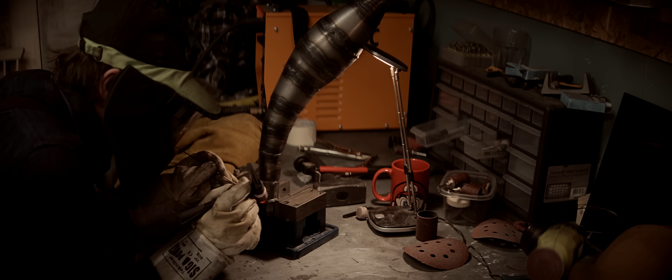There's threads in there, making the drill wander. I thought I clearly test fitted this. Did I test fit it in the wrong hole? It might be because I brought this from inside and it was hot, and now it's cooled down enough to be tighter. I'll turn it down until it fits.

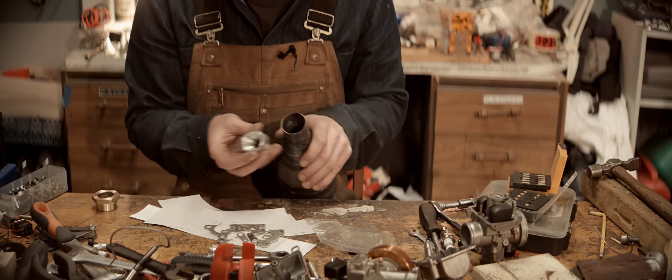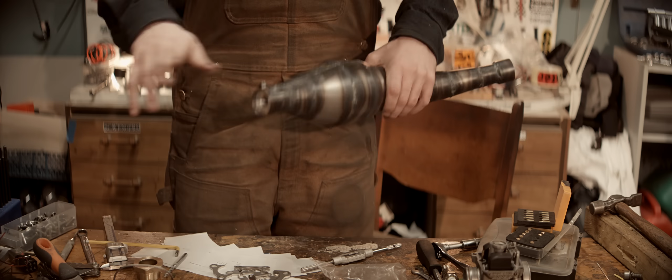This will be our hold-in thing, I think. Maybe it's overkill. Let's just drill and tap a hole. This is just too much. ...stinger. And now the exhaust spigot thing.

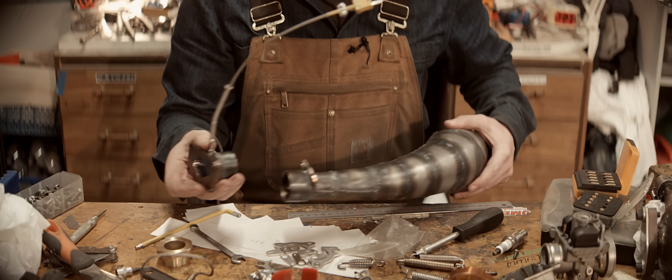It is done. I finished the rest of it, the welding of this spigot flange thing, and some spring mounts and stuff off camera, because I'm running out of time today, but I really want to get at least one test run in before I have to close shop.

As is tradition, I ran it out of fuel, and I also ran out of time, so this is the next day. I'm not trusting the fuel flow from this tank, so I've installed this separate tank, and we're going to use that from now on. And I've installed a filter just to be safe.

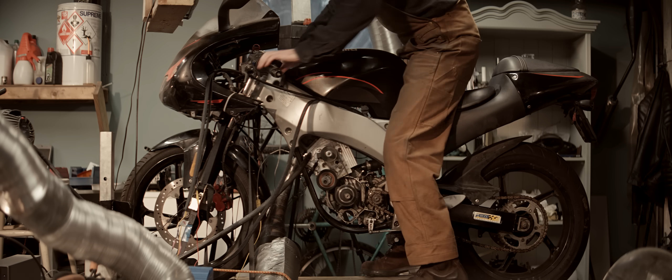I'm just gonna add in a bunch more timing down low, because there's no point in having it running this badly down there. Now set at a flat line 15 degrees, and below 12,000 you could probably run 30. So I need to update the software, because people have been saying that the version 106 software could have some problems with interpolation between points. Well, now there's from 10 to 12K. As long as it drops to 15 there, then we're fine. Gotta remember to turn on the screen recorder.

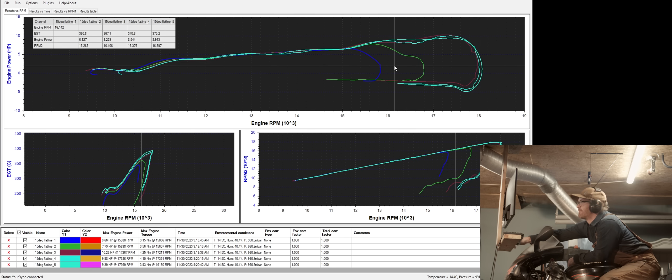Around 10 horsepower at 17,300 RPM, which isn't a lot, and torque is low, like between 3 and 4 newtons of torque, which is not a lot. You can see how it didn't want to rev until the pipe got heated up, which makes sense, and just cuts out at 18,000, sounds like a misfire or something.

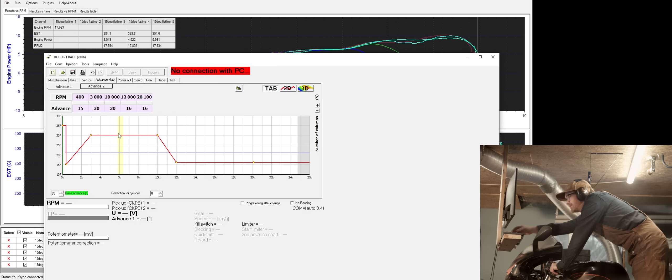I'm gonna increase timing by 1 degree, the flat line, and see how it behaves, because we don't know if 15 might be 14, you know. I haven't set timing that accurately, so let's try 1 degree more of timing, and we'll just keep increasing timing as long as power is raised.

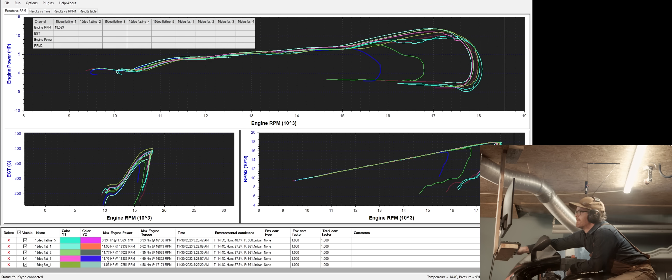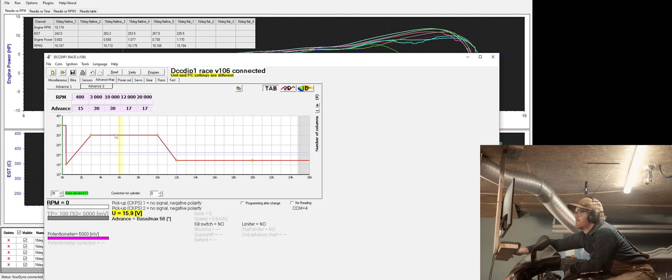So with 1 degree more of timing, we pretty much gain 1 horsepower, from around 10 to around 11 horsepower. So let's add in 1 more degree and see what happens. 17 degrees. I noticed it wouldn't rev as high, like it cut out a little bit earlier, which also makes sense because there's less heat in the pipe. EGT numbers are really low still, like they've always been. Okay, 17 degrees. Got a little bit more. Let's try 18.

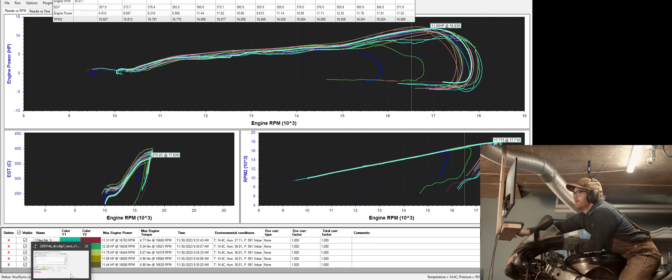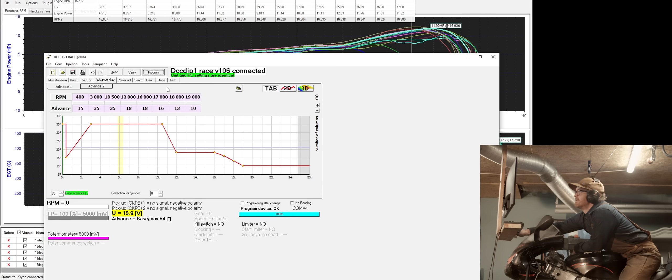Between like 11 and a half, 12 horsepower, and it seems like going up to 18 we're at the point of diminishing returns. We've also shifted the power peak almost 1000 RPM down in the power band. What I'm going to try now is to keep it at 18 at 16,000 and then ramp it down fairly quickly. Try 13. This is just for easier running below the power band. And now with a dropping curve after peak, which should be the ticket. Actually, I'll add another point and drop it even further, 18,000. See how it behaves, and then let's talk a little bit about what I think's going on.

It wanted to rev a little more, of course, with the lower timing up top, but less timing at the dropping curve made us lose power at peak. So the best one so far was the 18 degree flat line, the highest amount of torque and at high enough RPM to create the highest amount of power also. So almost like high 11, maybe 12 horsepower, which is half of what

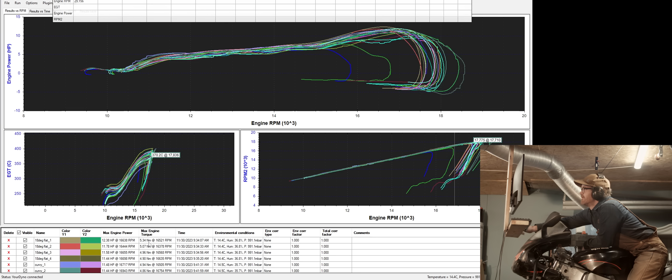I'm really looking for. I really don't think we're losing that much through the belt primary. There's definitely some losses here, but how much? Probably higher at high RPM, but they're not that different. With the Yasuni pipe we produced like 20 horsepower at 11,000 RPM. That would be obscene. So that pretty much rules out transmission losses as our problem. The secret lies within the pipe, and I have some theories about what's going on here and what we have to do to eliminate them.

Let's talk about it, but first let's enlarge the stinger, and that should weaken everything and make the whole pipe volume seem larger and slow down everything in a way. And that could help if my problem is the returning pressure waves gaining strength, like bunching up on each other, and maybe gaining so much speed that they're killing the suction wave. Might be that it's producing a shock wave. Let's talk about this later. I'll enlarge the stinger from 15 to 16 millimeters, and we'll see what happens.

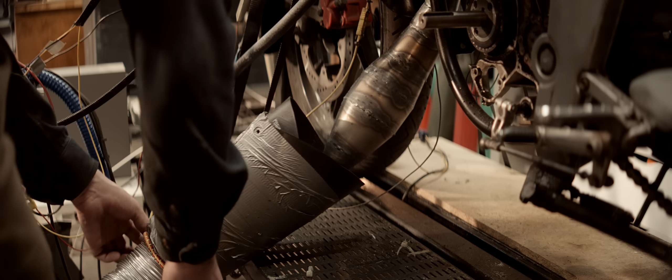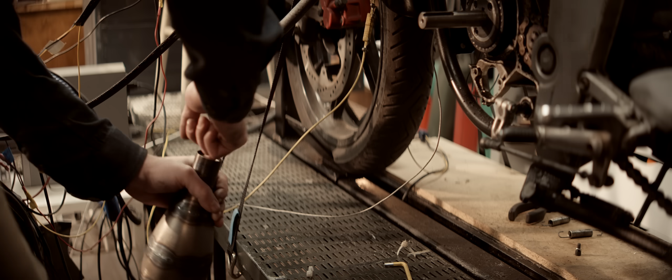As predicted, the stinger is hard to get out of there. I can see lots of oil around the exhaust flange, which means there's pressure. It's acting like it wants to go. Let's hammer it on some wood. Give me a second here, I'll find some measure to get this out of there, and we'll enlarge it and reinstall. I put a small Allen key in and grabbed it like that, and then not that hard actually. So 16 millimeter stinger.

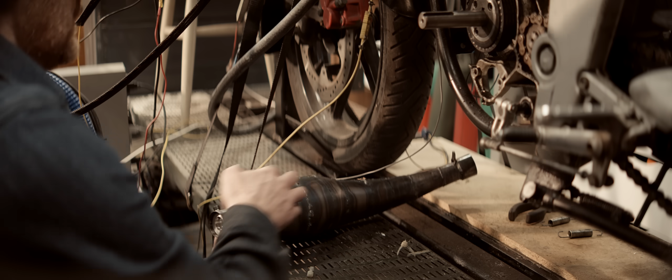If there's something going on with the returning pulse destroying the suction pulse, then this should help make the effects weaker, because the pulses should be weaker, and things should move slower. Let's return ignition timing to flatline 18 degrees, which gave best power. And flatline 18 degrees might actually be flatline 15 in this case, or 14 or 20, who knows. But I don't think it's higher. I think it's actually lower.

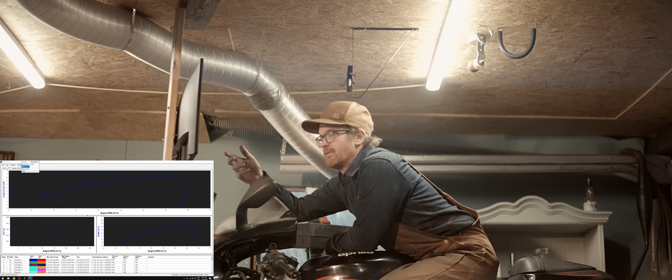So a 16 millimeter stinger, more power, which strengthens my theories here now. So let's see our progression so far. We started out with 6.66 horsepower. That was our first run, and then we got some heat into the pipe and stuff, and we ended up at around 10 horsepower. So let's use this run. So that's with a 15 degree flatline ignition timing.

Then we tried 16 degrees flatline, and we ended up at, I'll choose a run here, 11.05, so 11 horsepower, a little more power, but we lost some RPM. And then we tried 17 degrees flatline. We gained a little more power, but lost RPM again. 18 degrees flatline. Let's use this run. We again gained a little bit of power, but lost RPM. So we shifted peak power.

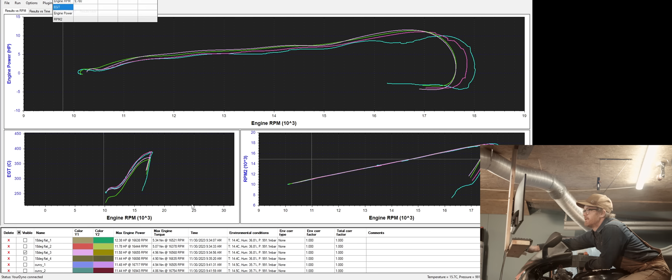Then we tried a curve, and a little bit inconsistent, but the curve is pretty much the same, so we pretty much didn't lose any power really, and we gained back the RPM as you would with lowering ignition timing past peak power.

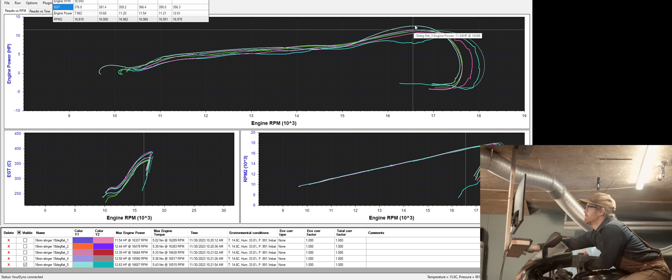Then we tried the 16 millimeter stinger and 18 degrees flatline, and power actually just increased throughout the runs here, pretty much. So the last run gained power with heat, and the highest was 5.43 Newton meters of torque. But here you can see that run. So that's the most, 12.6 horsepower. That's the highest so far actually, and with a 16 millimeter stinger, which is too large. A small 16mm stinger restriction is too large for 12.6 horsepower.

Well, that's wheel horsepower, so I'm not sure how much transmission loss we're talking here, but let's say there's 25% transmission loss with everything here. And that equates to times 1.25, 15.75 crank horsepower, which isn't a lot. But that's probably the numbers we're at now.

I have some theories about what's going on here. The pipe was designed for peak power at 18,000 RPM. Now there's temperatures and stuff, so you really have to design the pipe and then test it and log some temperatures, and then you can refine the model. But it's hitting pretty close. But the thing is, it seems to be hitting somewhat of a power band starting at around 11,000 RPM. But then the real power band seems to kick in at like 16 or something. So it's acting like it has two power bands.

But I think maybe what's going on is that there's fairly weak pulses from 11,000 and upwards, and things are moving quite slowly. And then at around 16,000, the pulses get stronger and things start ramping up. Peak power is sitting at around 17,500 RPM, a little bit lower depending on ignition timing. But what I think is happening is the pulses get so strong and they start bunching up on each other and moving so fast that after peak power it just dies, abrupt dying, like it seems ignition timing related.